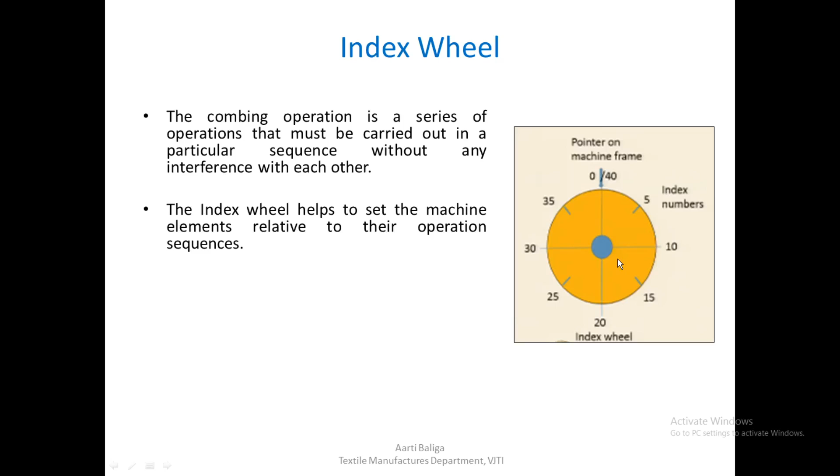The combing operation is a series of operations that must be carried out in a particular sequence without any interference with each other. So this is the first condition, and for this the index wheel helps set the machine elements relative to their operation sequences. By looking at the numbers and setting them accordingly, it will help us set these operations relative to each other in their particular required sequence.

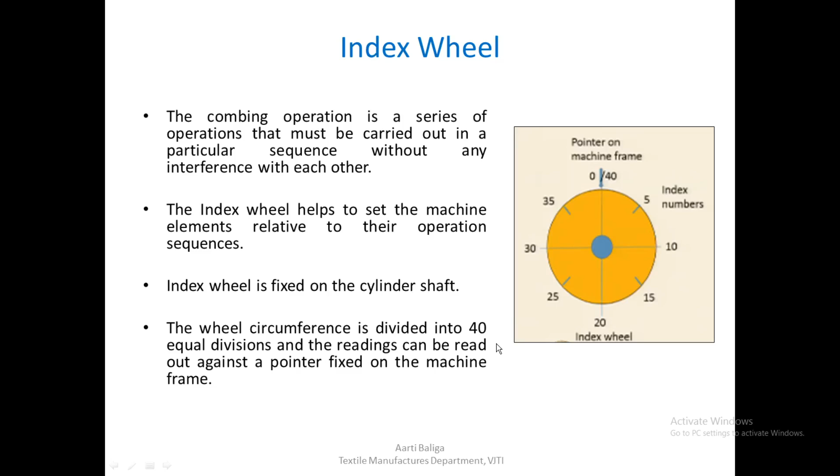The index wheel is fixed on the cylinder shaft. The wheel circumference is divided into 40 equal divisions, and the readings can be read out against a pointer fixed on the machine frame.

There's a pointer on the machine frame, and as this index wheel rotates along with the cylinder shaft, whatever number comes against the pointer can be read. During setting, these particular numbers help us set those operations to begin and end at those particular timings as per the numbers seen on this index wheel.

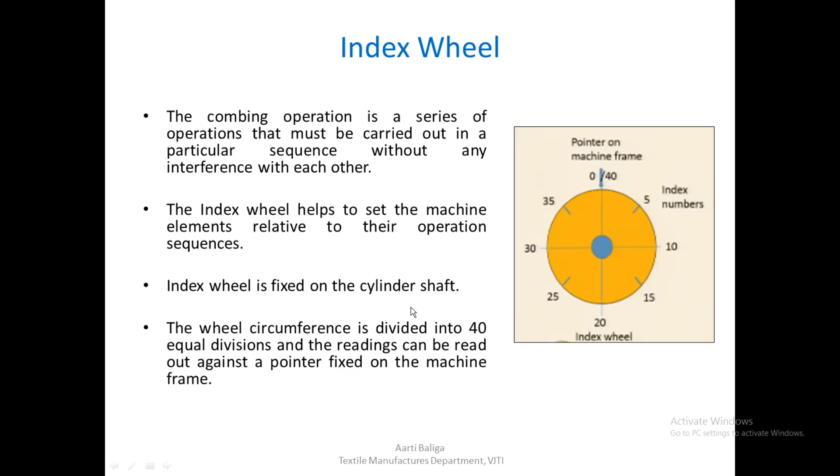So with this basic background of how these numbers are actually set, let us see how these operations are divided, and how the sequences are set relative to each other.

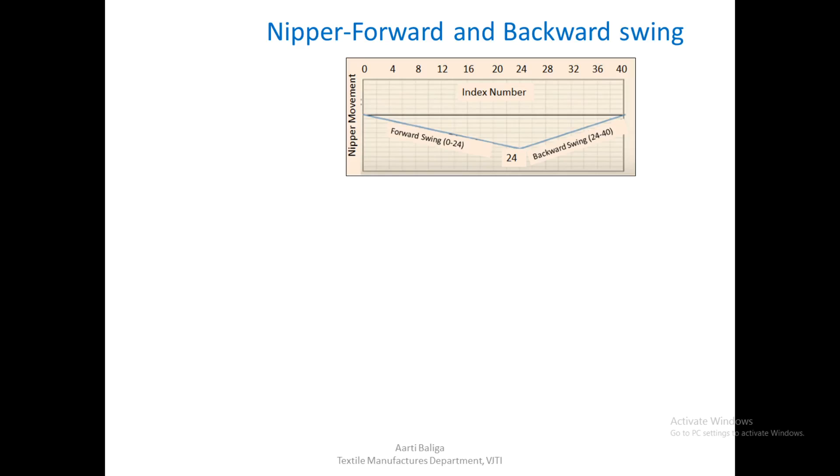First let us begin with the nipper operation or the nipper movement. The entire nipper assembly should be moving forward and backward, with a swing in the forward direction and the backward direction. This is the index timing shown in the form of a graph. You can see there are 40 divisions shown on the index wheel, on this x-axis, and we shall see how this nipper movement is allotted a particular timing for its forward and backward swing.

Combing has to be carried out when the nipper assembly is farthest from the detaching roller. If you remember the sequence, there is a cylinder in between the nipper assembly and the detaching roller, and the cylinder action requires some space before the combed fringe is delivered to the detaching roller. So ideally, the combing has to be carried out when the nipper assembly is as far away from the detaching roller as possible.

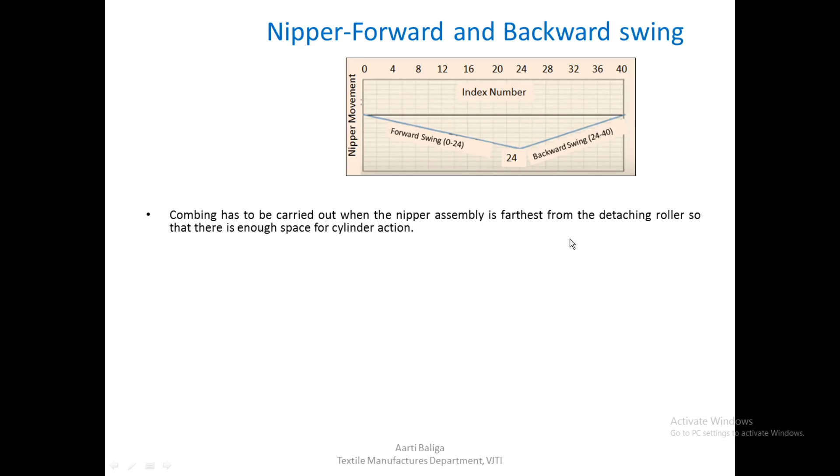With this in mind, this is how the nipper assembly works, as we've seen earlier. This entire nipper assembly is moved by the nipper shaft, making it swing forward and backward. At this particular moment, the cylinder is in action. As you can see, the half lap is pointing upwards, and the nipper assembly is as far back as possible, with enough space between the detaching roller and the nipper assembly so that proper combing action can take place.

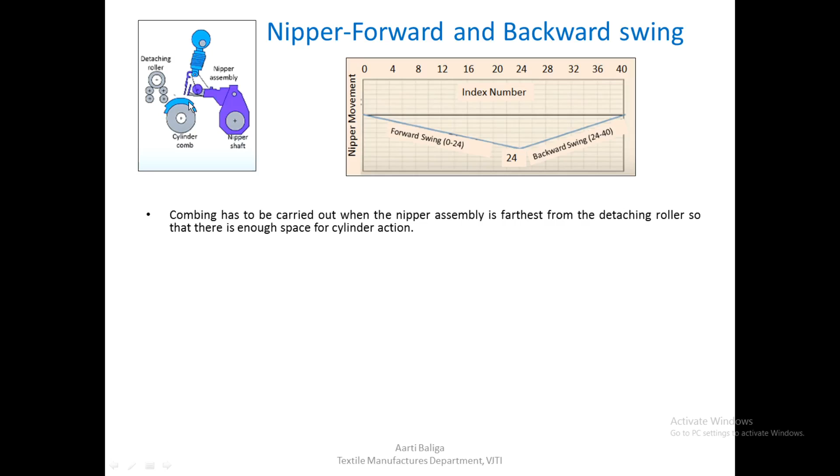So this should be the position. The nipper assembly moves forward and backward, and more time is to be allotted for the forward movement. We cannot say that forward and backward get the same time and things are all right—there's an observation that more time needs to be allotted for the forward movement than the backward movement, and this is because we need the forward movement of the nipper assembly to be slow.

Why exactly do we want it to be slow? As the nipper assembly is moving forward, along with the combed fringe being freshly combed by the cylinder to pass it on to the detaching roller, we have to see that the fringe is very delicate. Because of the movement, whatever surrounding air movement is there, it should not buckle the combed fringe from the front at the leading edge of the fibers. That is why it has to be as slow as possible so that they do not buckle.

The slow movement of the nipper assembly in the forward direction shall not buckle the combed fringe moving towards the detaching roller due to air drag, and shall not adversely affect the piecing quality. So definitely we must keep the forward movement slower than the backward movement.

So a ratio is selected which is 60 to 40 - forward is more, backward is less, in this ratio the particular time is chosen. If there are 40 divisions for this entire forward and backward movement of the nipper assembly, we can allocate 0.6, that is 60%, for forward - that is 24 divisions - and the remaining 16 for the backward journey. Let us say we begin with the nipper assembly.

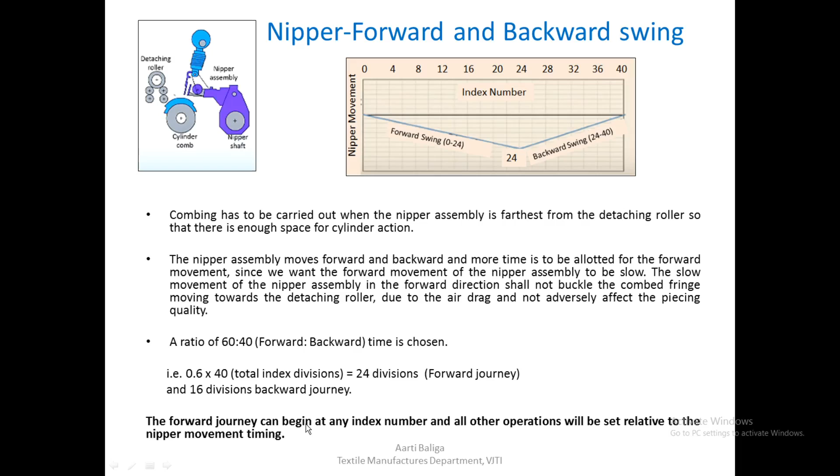So having fixed this movement, let us move further. The forward journey can begin at any index, as I just mentioned, and all other operations will be set relative to the nipper movement timing.

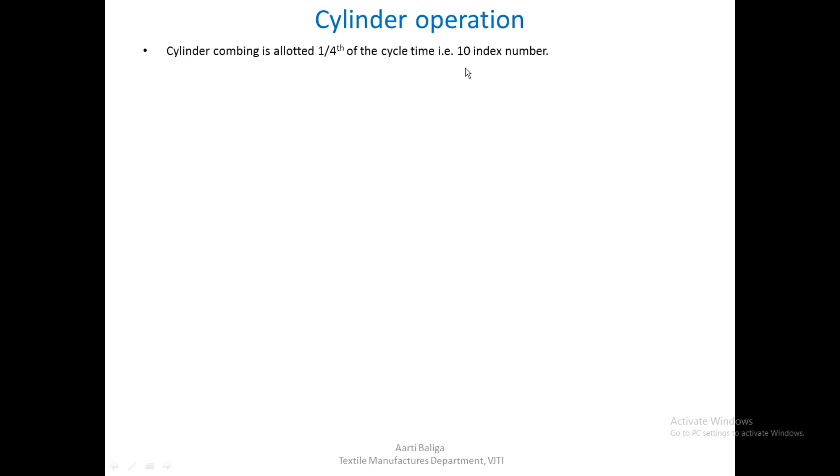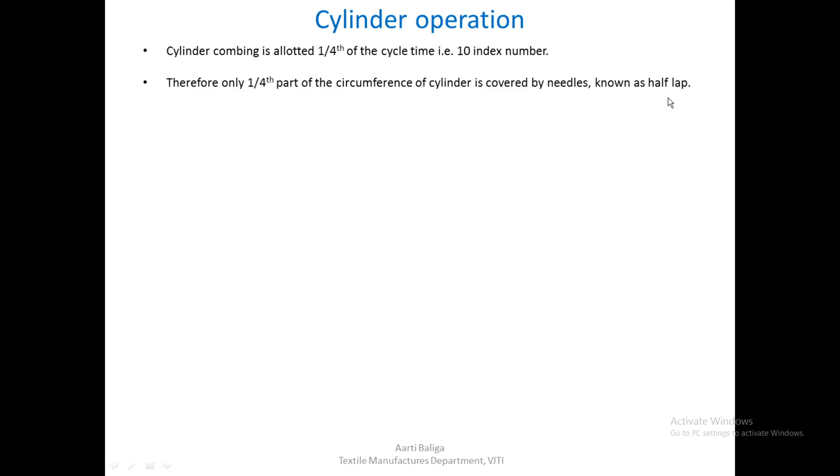So now next we see is the cylinder operation. The cylinder combing is allotted one-fourth of the cycle time. Now one-fourth of 40 means 10 index numbers, and therefore only one-fourth part of the circumference - we must have observed that one-fourth part of the circumference of the cylinder is covered by needles - which also has got a name: it is called a half lap.

If we need to increase the surface area of the needles, we need to increase the diameter of the cylinder, but we need to increase the surface area without any increase in the cylinder weight. We must remember this cylinder is rotating at a very high speed, and we should not, as far as possible, try to increase the cylinder weight. But if at the same time we need a larger surface area of the needles for better combing, we must find some other way to do it.

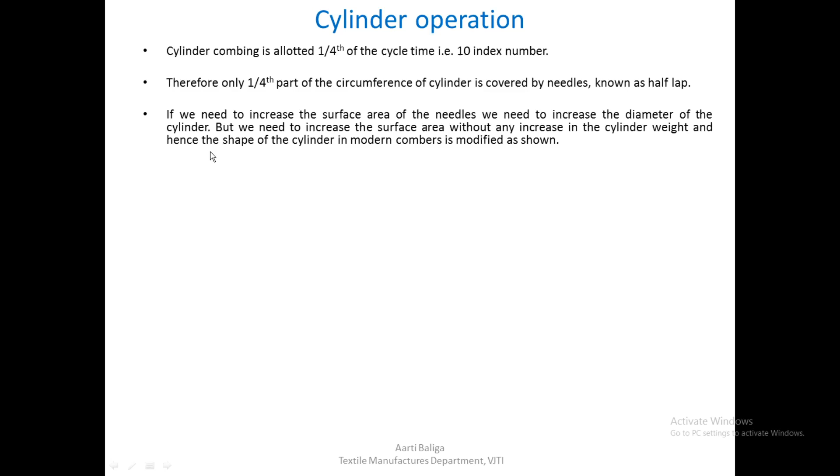That is done in modern combers by changing the shape of the cylinders. As we can see, this is a modified shape. This will not increase the weight of the entire cylinder, but at the same time it has allowed for a larger comb area, which they claim is 130 degrees here. So this is how it is worked out.

The combing by cylinder must start when the nippers are farthest from the detaching roller, so that there is sufficient space for combing - that is, during the backward to forward journey of the nipper assembly. That means when it is farthest away from the detaching roller, the nipper is at the backwardmost position, and from there onwards it would start the forward journey. So during this time, this is the ideal time for the combing operation to start.

Therefore, the combing operation starts just 5 index numbers before the completion of the backward swing. The backward swing is from 24 to 40, as we saw. At 40 it would be at the backwardmost position. So before that, we subtract 5 index numbers, and at this 35 index number we can start the combing by cylinder very safely, because once it begins to comb at 35, the nipper assembly would have moved still further back up to 40, and from 35 to 40 and beyond, a total of 10 index numbers we need to allot to cylinder combing.

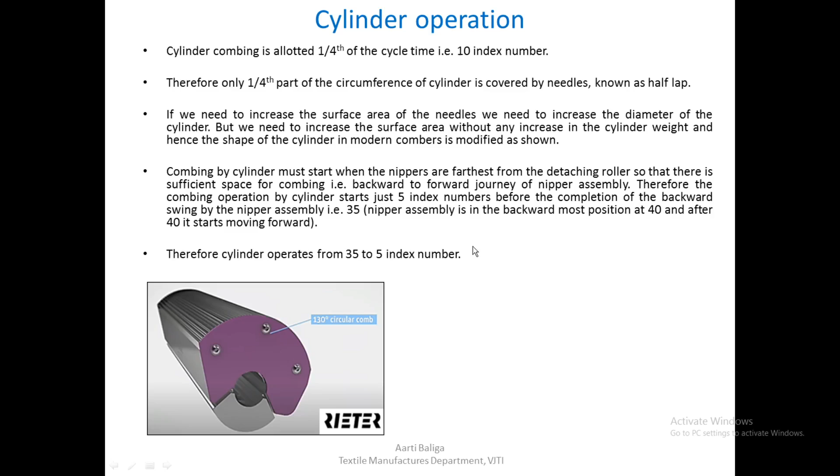So the cylinder operates from 35 to 5 index numbers. Having seen this, let us put this in the form of the graph that we have done earlier. Forward swing was from 0 to 24, and 24 to 40 was a backward swing.

Combing starts 5 index numbers just before the backward swing ends, which is at 35. So combing will start at 35 and move right through 40, and again the index would be 0 at that time, from 0 to 5. So this would be the area for the cylinder to operate.

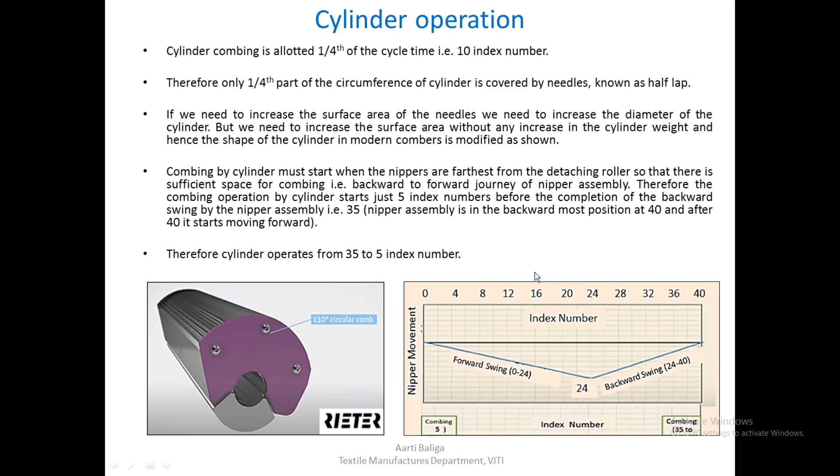Now, having seen the cylinder operation, let us go to the nipper opening and closing. We must also arrange for nipper opening and closing: when it should open, when it should close, and how much time we can allot for each operation.

So the nipper must be closed for the entire duration; now we must understand the conditions. We want the nippers to be closed for the entire duration of the combing operation, that is this entire 10 divisions from 35 to 5. We must keep the nippers closed, otherwise all the fibers would be taken away into the noil.

In addition to this 10 divisions, we give another 6 for safety's sake, so that we are 100% sure that the nippers are closed during the entire combing operation and we do not lose any good fibers. So we give a plus 6 for safety, and so we now have 16 divisions for this operation to happen.

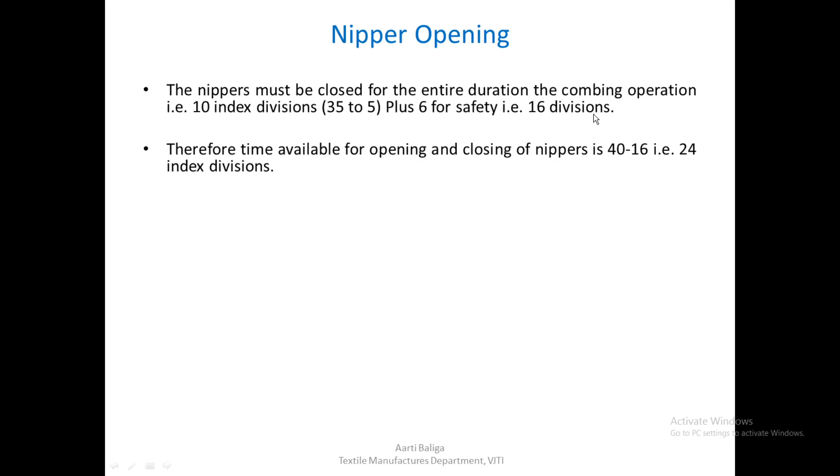So therefore the time available, this closing time, should be 16 divisions. So the remaining time, that is 40 minus 16, that is 24 index divisions, we would be having for this entire operation to happen, that is opening and closing should happen within these 24 divisions, because 16 divisions we have fixed entirely for the nippers to be closed.

Now we also have to give more time for opening than closing, since we want to avoid any abrupt movements of this opening and closing. We give opening 60% of the time and 40% for the closing. So if we take 60% of 24 divisions, we get 14.4 divisions, and similarly we get 9.6 divisions for closing.

Now we need to understand, if we get 14.4 divisions for the opening of the nippers, when exactly it should begin, so that we can find the time of starting of closing. The starting time of nippers will only be after the cylinder combing is complete, that is after index number 5. We have seen that this entire combing operation should happen with nippers being closed.

So the opening will happen only after this. When the cylinder operation ends, that is at 5, we give plus 5 divisions allowance for safety. So the nipper will start opening only at index number 10, and as we have decided, we are giving 14.4 divisions for this entire gradual opening to take place.

So it will take 14.4 divisions to open; it will be completely open, as it is gradually opening, at around 24.4, that is you can say index number 24.

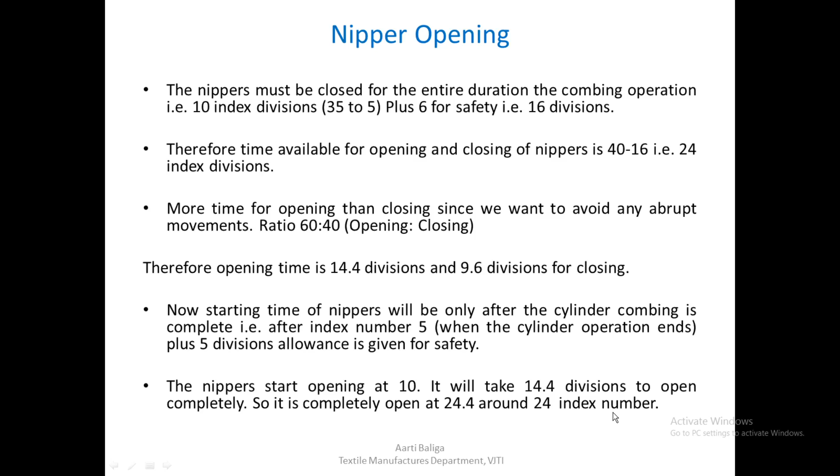So let us now add this element to our earlier graph. We have already put in nipper movement, we have put combing timing. Now we put in the nipper opening, which starts at 10 and is completely open at 24.

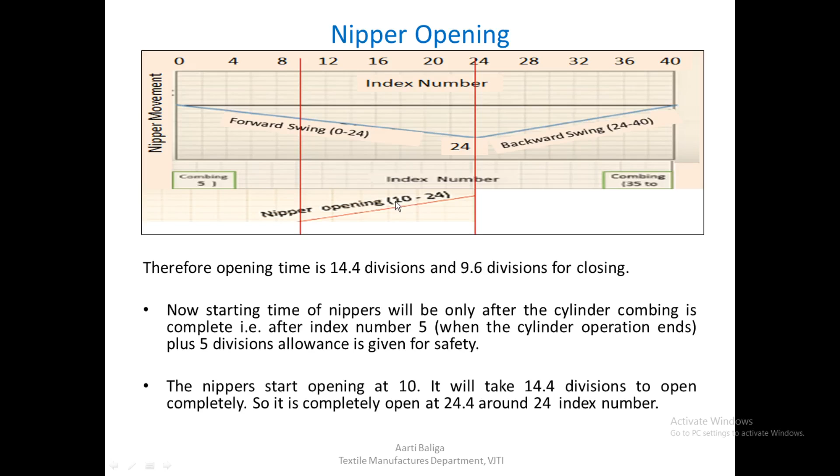Now let us go to the nipper closing in the similar manner. Since it has opened up to 24, from 24 onwards it will start closing, and we have allocated, as per this ratio in our earlier slide, 9.6 divisions for the entire gradual closing of the nippers. So at 24 the nippers will start closing and continue for the next 9.6 divisions, which comes to around 33.6, so you can say at around 34.

So it will be completely closed, and gradually it will start closing at 24 and complete its closing at 34. This 34 is very important, because immediately after 34 the next cylinder combing would begin, and at that time, at any cost, we need the nippers to be completely closed. So if this nipper surely closes at 34, we have one division time before the cylinder starts its combing at 35.

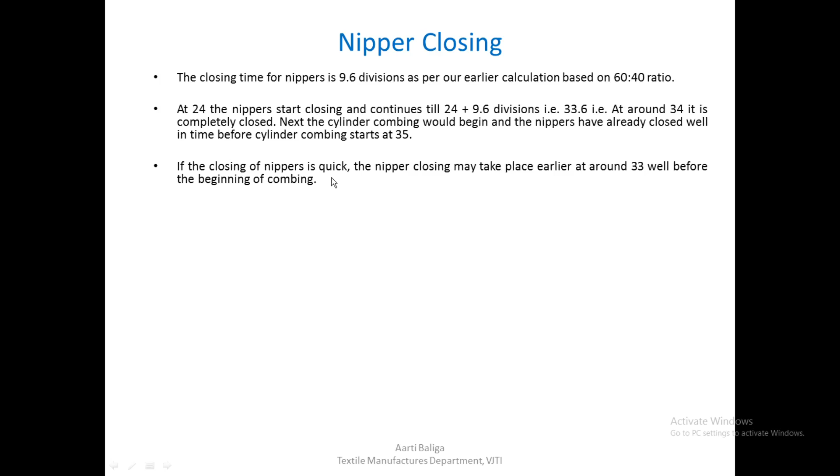So if the closing of nipper is quick, if we are able to quickly close the nippers, then the nipper closing may even take place a little bit earlier, around 33, well before the beginning of combing. It depends on the kind of mechanism we have used for opening and closing. So if it is possible to close it earlier, it is still better. We can close it at around 33, so that safely combing can start at 35.

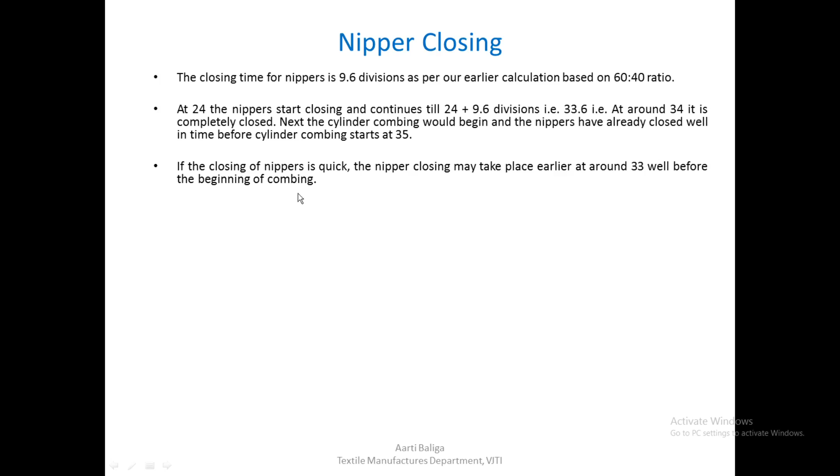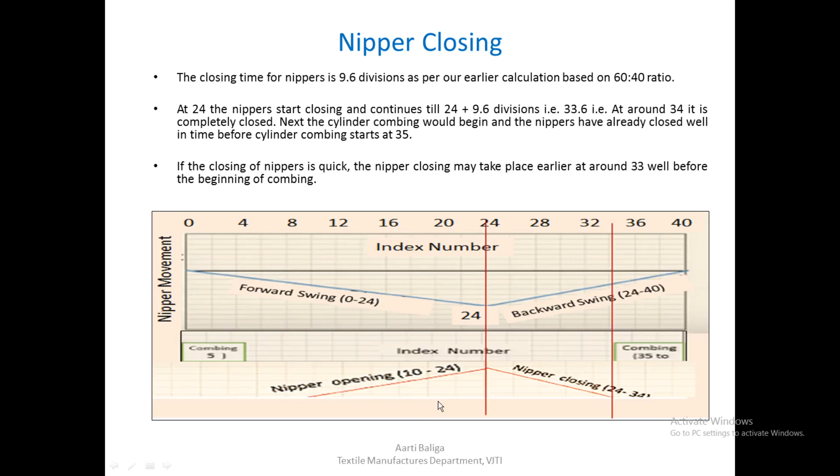So representing this on the graph, we see that the nipper will close from 24 and completely close at around 34. We just draw this, and this is the next step where we have added nipper opening and closing. So we come to the feed roller movement.

The feed roller needs to move intermittently. So what are the timings we should fix on that? There are conditions we must remember before we fix up these timings. Let us look at them. During lap feed, the nipper must be open - that's the first condition. Nipper must be open whenever the lap is being fed, and feeding should end before cylinder combing begins. So the feeding should end definitely before 35.

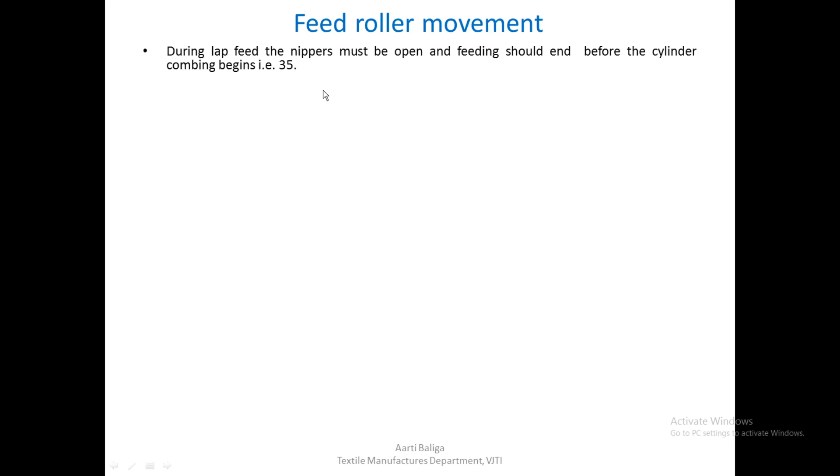So lap feed can be during the forward swing of the nipper assembly, from 10 to 24. So around 13 to 24 to be sure, as the nippers are open enough throughout. As we saw in our earlier graph or discussion, the nipper would be open in this particular index timing. So we can safely have the feeding from around 13 to 24. We are sure that the nippers are completely open.

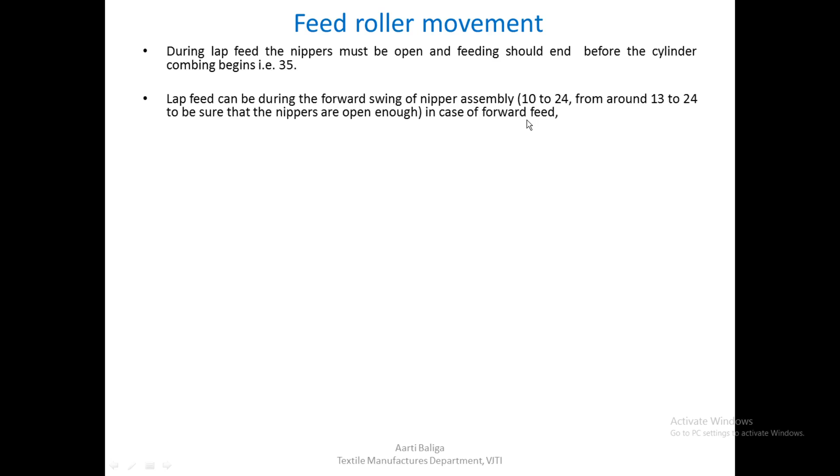In case of forward feed, if we are looking at forward feed, we should look at this particular timing. It can start from 13 right up to 24, when we are sure nippers are completely open, and we are also sure that it is not interfering anywhere with the combing. We can see this entire gap is empty, and that means the combing has started at 35 but ended at 5, which is well before - the feeding operation will complete within this time before the next combing cycle begins.

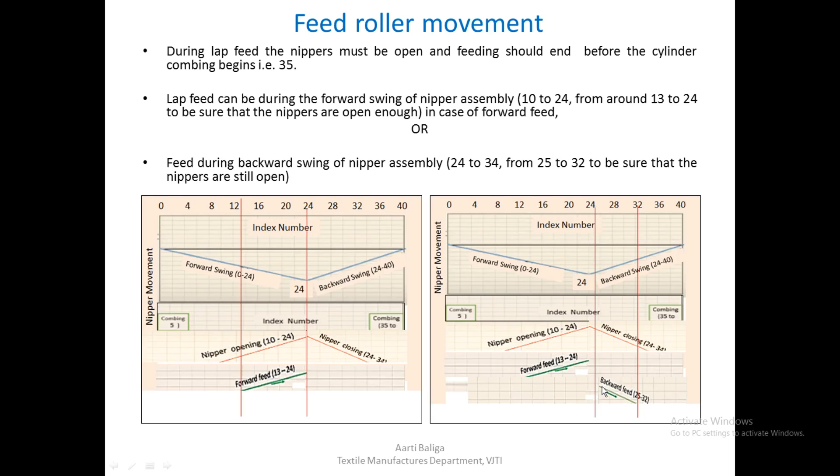During the backward swing, if we are looking at the backward feed, then in that case it will happen from 24 to 34, because this is the backward feed timing. But again, the same two conditions apply: the nippers must be completely open, and it should be completed well before combing starts. So safely we can say that from 25 to maybe 32, we can be sure that the nippers are still open, and definitely at 32 we are sure that combing has not started. So our backward swing can be from 25 to 32.

So with this understanding, let us see how the forward and backward direction rotation for this detaching roller are fixed, the timings that are allotted to it. So the detaching roller rotates in the forward and backward direction, and around 50% time is allotted to the detaching roller rotation.

Out of the entire 40 divisions, we are allotting 20 divisions to this particular operation, and both rotations are equally divided - that is 10 divisions for forward and 10 divisions for backward rotation. So the detaching roller must rotate only during the forward movement of the nipper assembly.

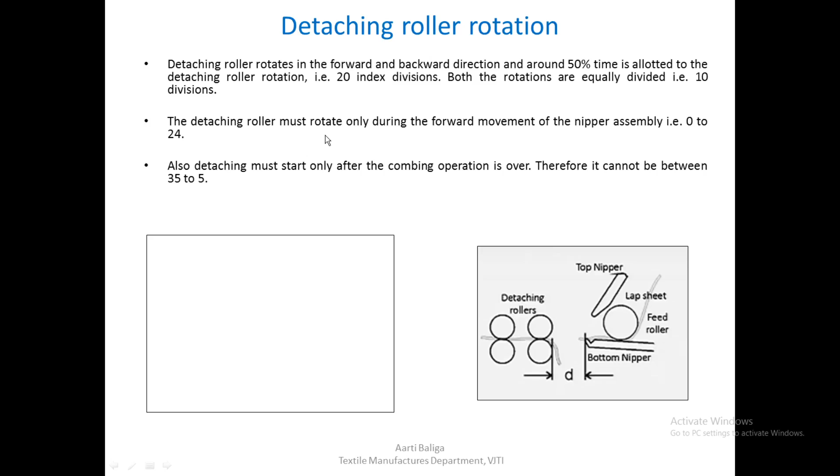That is, when the nippers are moving forward, it starts at 0 and goes up to 24. So during this time, the detaching roller must rotate forward. Also, detaching must start only after the combing operation is over, therefore it cannot be between 35 to 5. So these are the two conditions for fixing the detaching roller timing.

So the window left for the detaching roller rotation is between 5 - that means after the completion of the cylinder operation - and right up to 24, because during this time the nipper assembly would be moving forward as per our condition. So up to 24, we have around 19 divisions with us, where we can give the detaching roller its rotation.

So for the backward rotation of the detaching roller, the rotation will begin at around 7. 7 is because we want to be safe about the completion of the combing operation. So the backward rotation will start at 7 and go right up to 10 divisions, as we had decided, giving 10 divisions for each forward and backward. So it ends at 17 - it will start at 7 and end at 17, which is 7 plus 10 divisions.

After this, the detaching roller will start moving forward, that is from 17 onwards, and again we have 10 divisions allotted, so up to 27. Since beyond 24 we had said the nipper assembly should be moving forward, but even if we go up to 27 there is no harm, because the detaching roller's forward rotation does not interfere with any other movement or operation happening during this time.

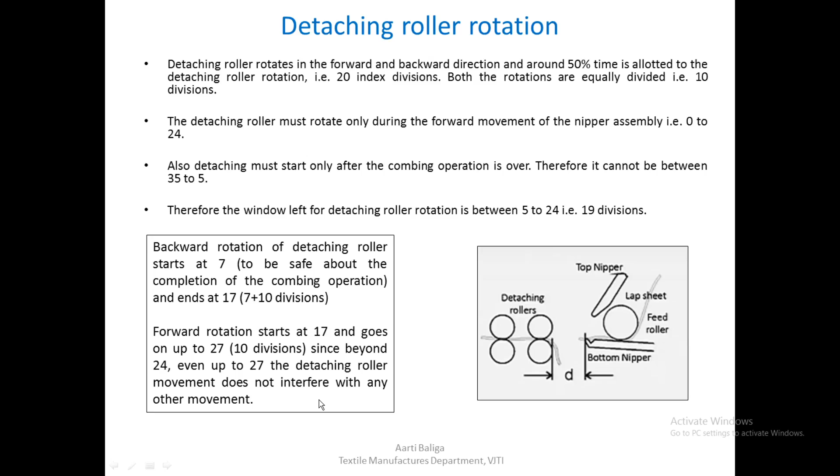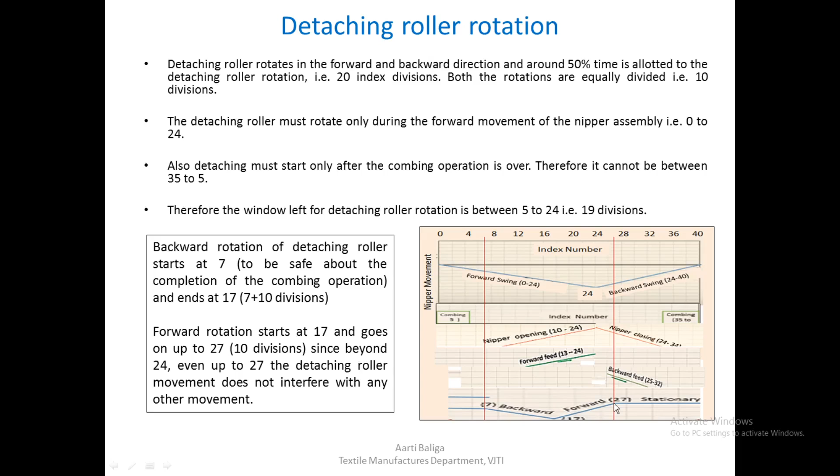So now, having seen all this, let us see how the top comb timings are fixed. Now we know that the top comb should penetrate the fringe only after the detachment process begins. This is because if it enters earlier, the front end of the combed fringe will get buckled.

Because if the top comb is already there in the area, then the nipper assembly, as it is moving forward, will be faced with a sort of obstacle due to the top comb already present between it and the detaching roller. So the fringe might get buckled as it has not yet reached the detaching roller, and therefore the entry of the top comb will interfere with the piecing process and also the quality of the sliver.

So we must see that top comb timings are perfectly fixed. Only after the front end of the combed fringe is gripped by the detaching roller should the top comb enter - that is 1 or 2 divisions after the detaching roller starts rotating forward. We saw in the earlier slide that it starts rotating forward at around 17, and therefore this top comb entry can happen safely 1 or 2 divisions later, around 18 or even 19.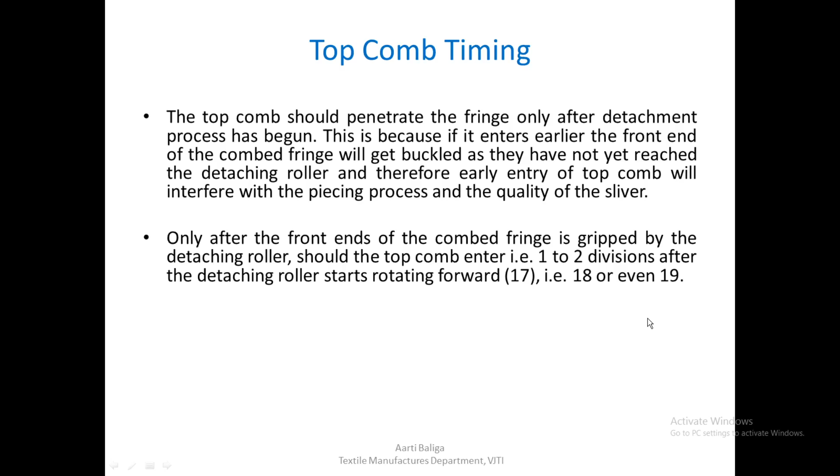So the top comb must remain in action till the detaching roller is going on, but must end before the cylinder operation begins. This is for sure, because the cylinder will start its operation at 35. So under any condition, the top comb operation must stop before 35. So safely we can say that we stop it at 31. So top comb entry will take place at around 18, and it will remain till 31, where it will be withdrawn.